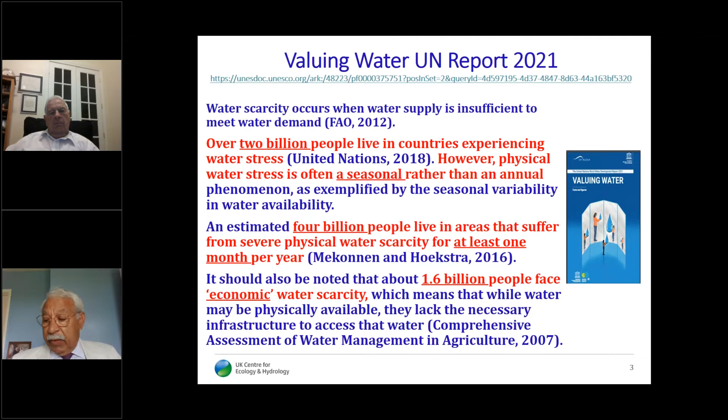So here I was defining water scarcity by saying the water supply is insufficient to meet the water demand. According to the last UN report of 2021, we have over 2 billion people living in countries where physical water stress is felt at least one season per year. And about 4 billion people live in areas where they feel water stress at least 1 month a year, in addition to 1.6 billion people facing economic water scarcity due to infrastructure not being in place, or the investment not being in place.

Also, the water shortage over the last decades shows the red regions in 1950 compared to 2000, 2025 and 2050. It shows there is an expected water shortage and water stress in different parts of the world as time goes by.

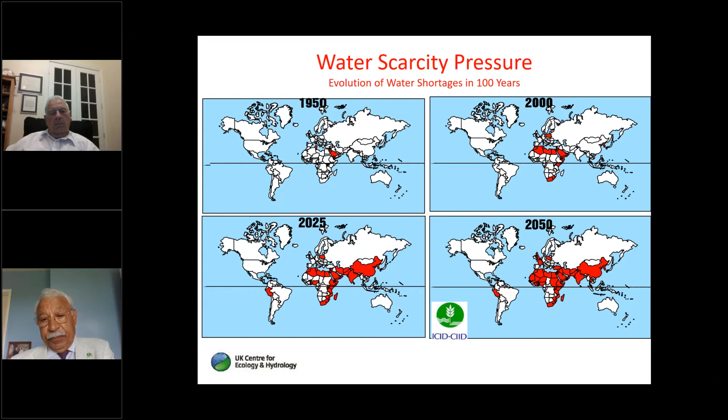And that actually triggered the call by Kofi Annan that we need a blue revolution in agriculture, and we really need to increase water productivity. We need to have more crop per drop.

Added to the population increase and the increase of water abstraction is climate change as well, and its impact on water resources. If we look here, the expectation is that some areas in the world will have less rainfall and higher temperature. Higher temperature means high evapotranspiration, higher crop water requirements, and reduced yield. We also expect to see some drought events and less rainfall in some areas as well.

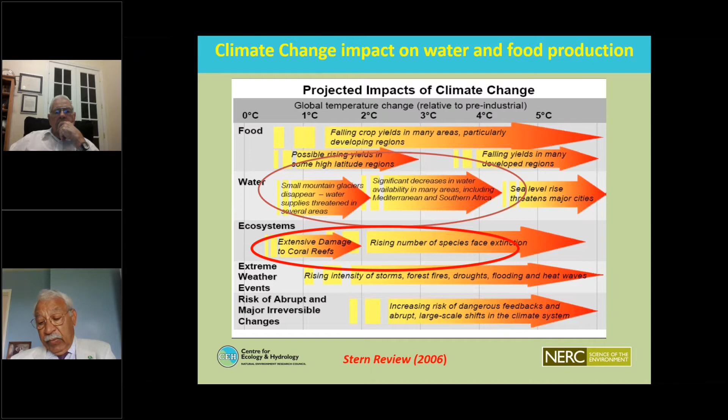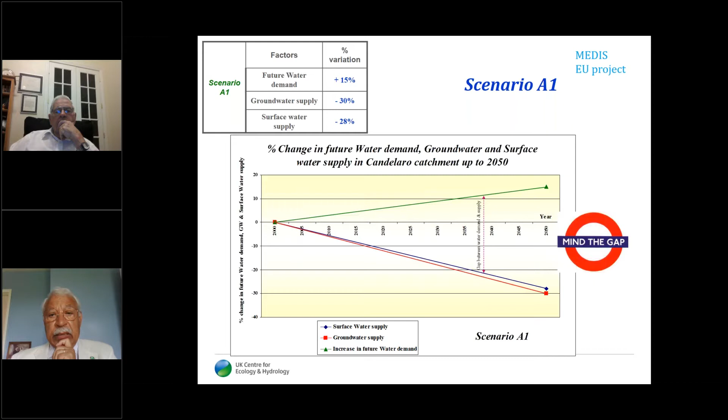And in our work in a number of EU projects, we have been looking at water supply and demand. The water supply and demand here in an area in Italy shows by 2050 there's a big gap. We also tried that in Cyprus, and we got the same gap between supply and demand.

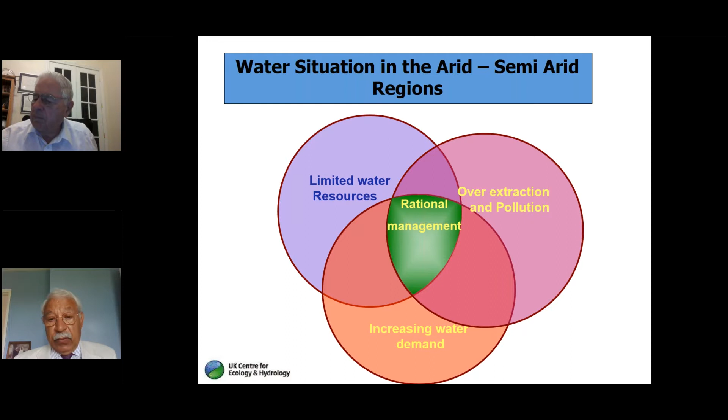So in water stressed and water scarcity regions, usually you have issues related to limited water resources, over extraction and pollution, and also increasing water demand, and that requires rational management of the resources. Rational management requires integrated water management, which looks at the supply side and the demand side. The supply side includes surface water, groundwater and non-conventional water resources.

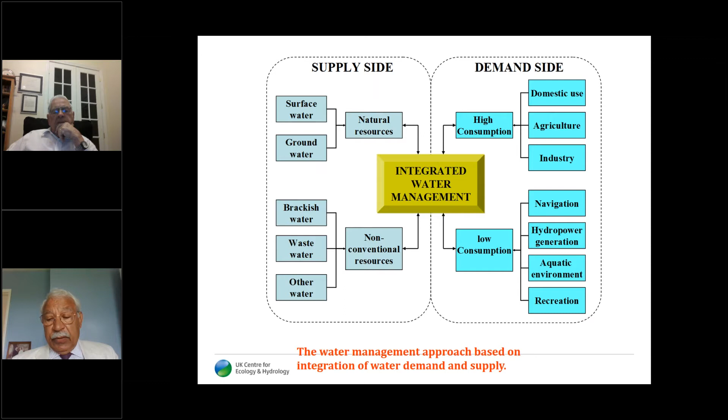On the demand side, you have the high consuming sectors like domestic, agriculture and industry, especially agriculture, which consumes at least 70% of the fresh water, and the low consuming sectors like navigation, hydropower, aquatic environment, and recreation.

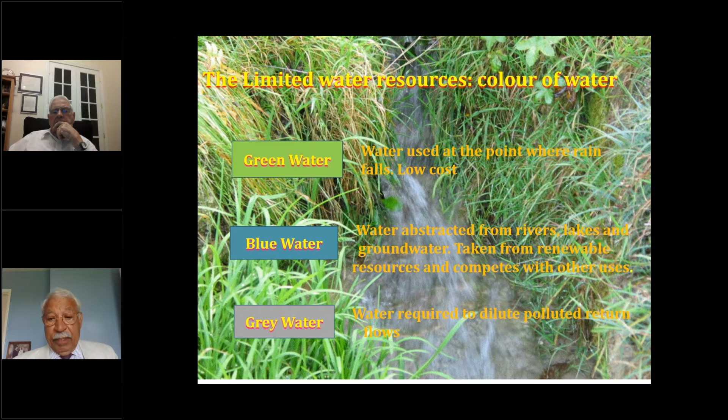Also, we need to take into account that we have different colors of water. Green water is the water that comes from rainfall. It is used where it falls, and usually it is at low cost. Water abstraction from rivers and lakes is labeled as blue water. And also gray water, which is the water that comes from domestic waste and industrial waste as well.

And the different approaches to cope with less water in water scarcity regions would direct us to increase the water supply and to use the water resources more efficiently. I will go to the first point, how to increase water supplies.

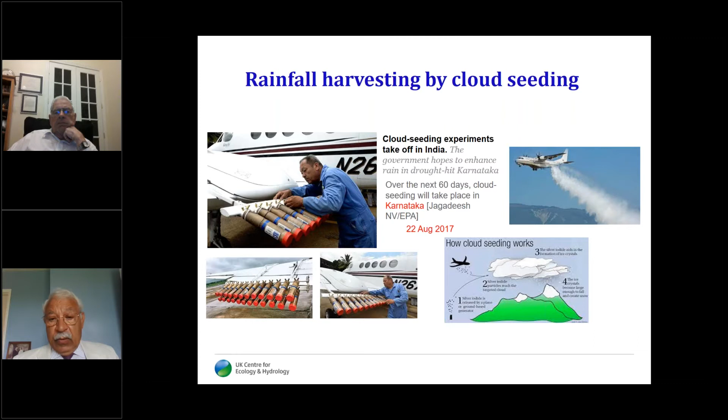And also here in Karnataka in India, where the state was subject to drought in 2017, they also used that in order to solve the problem of drought. And currently there is research here in the UK where they actually zap the clouds by applying an electric shock to the clouds and harvesting the water.

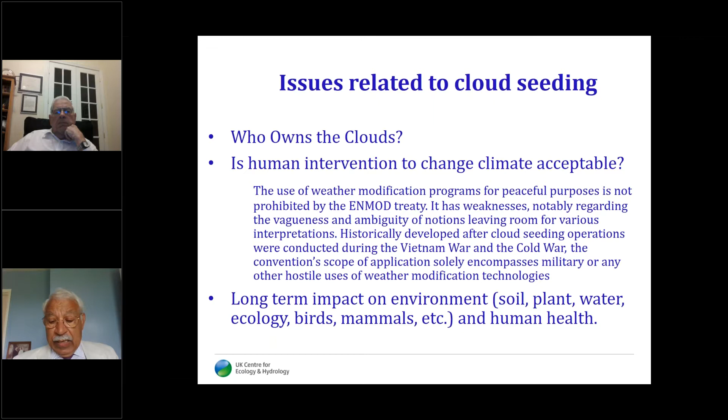Of course, there are some issues related to cloud seeding, related to who owns the cloud. Is human intervention in the climate acceptable? And what would be the long-term impact on the environment and human health?

These are some issues. Also, fog harvesting is another way of increasing water supply, and that implies having vertical mesh nets and then collecting the water that falls and runs across those vertical meshes.

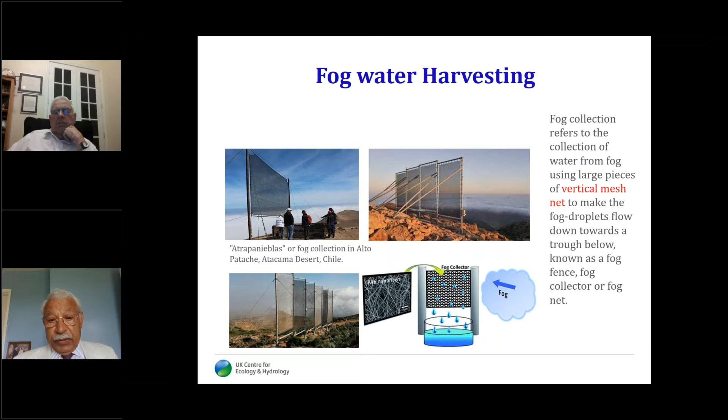Another thing, which I had a PhD student from Spain work on, is to use condensing surfaces. These are dew water condensers using films or foils that collect water from certain surfaces and harvest that water for different uses.

We can also harvest water at different scales: at the roofs of houses, and also micro catchments and macro catchments. In one small project I have been doing in the neighborhood of UKCEH, I looked at different houses with different aspects to the wind directions, different roof apexes and flat roofs, and looked at the amount these houses can harvest.

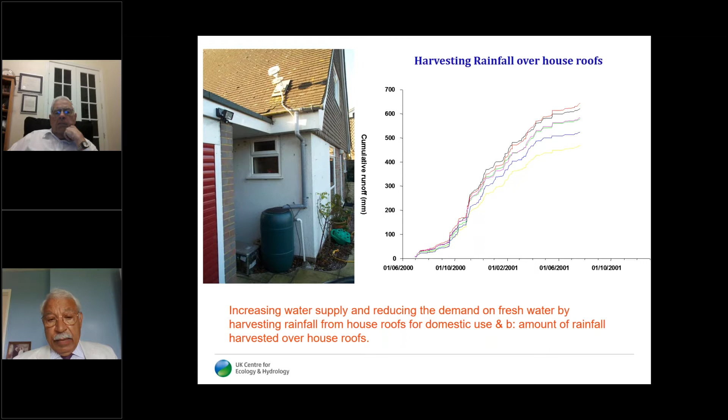And I was surprised to see that we can actually get a lot of water. Here it is about 700 millimeters within a year, which is really quite a big amount of water. And if you want to look at the balance of urban areas and cities, you can scale that up with LiDAR images, look at the number of house types and the number of units, and then work out how much you would harvest over a certain area,

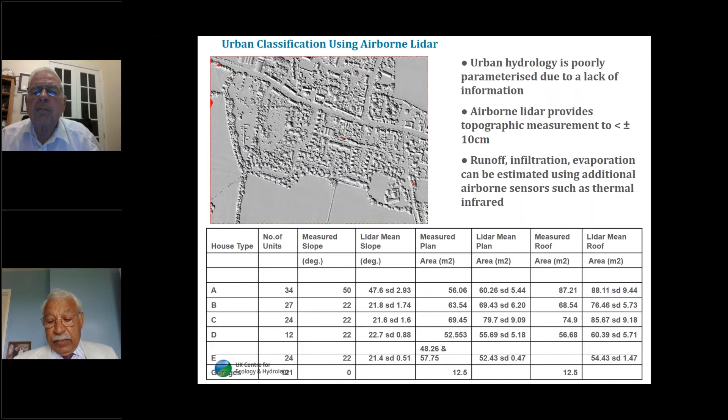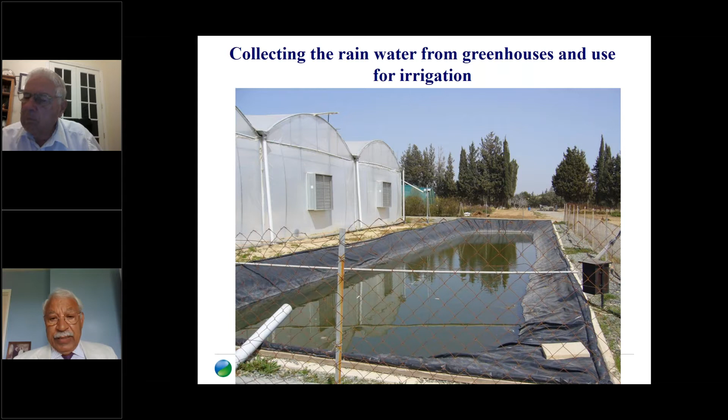and how much your sewage system or storm drainage system can cope with the runoff should you get that amount of rainfall. There are some publications you might also look at. Also, water can be harvested on top of greenhouses and used to grow flowers or even vegetables. That's another source we could look at to increase our supply.

Another thing I have seen in Brazil is underground dams, where they dig a ditch and then put plastic sheets between different sections. They have different ditches parallel to each other, dividing the area into sections, and the water that falls between one section and another remains within that section, with no lateral movement to the right or to the left.

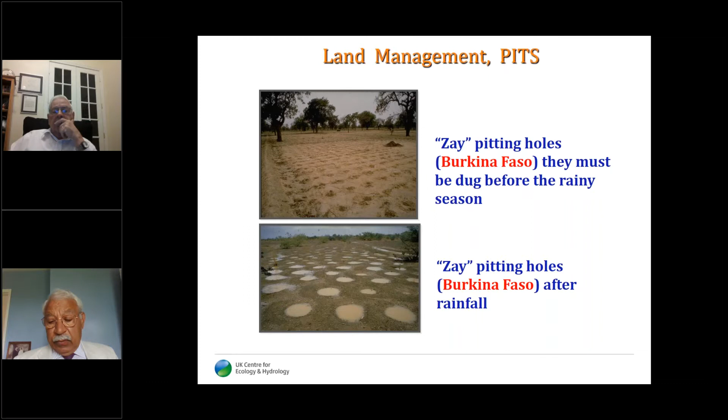Another thing we were involved in during the early 2000s is the zay, or pits, where we make land management holes to accumulate the rain, and then we plant those holes with crops or trees. And this is an example from activities in Burkina Faso, where they also use that system.

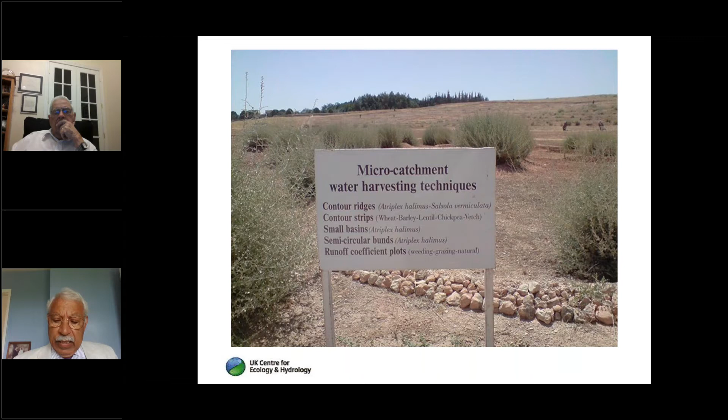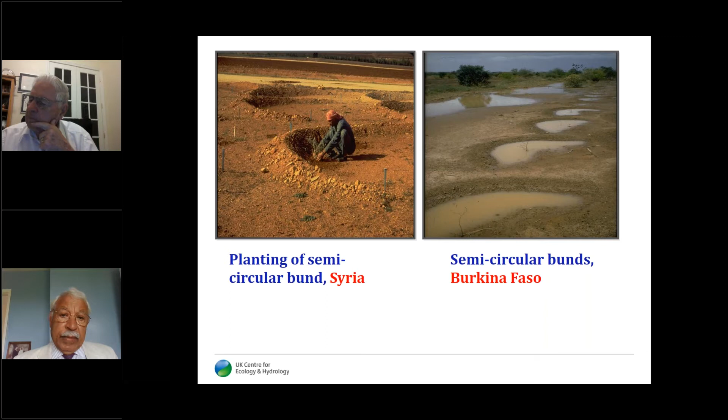Our work with ICARDA in Syria also looked at different ways of harvesting water through land management, and this is an example of them. Here are the different methods they used to harvest water as it falls in these areas. These are examples of how you organize your land so that when the water falls, it can be kept within these structures and used efficiently by the trees, as an additional source of water. So these are some examples of land management.

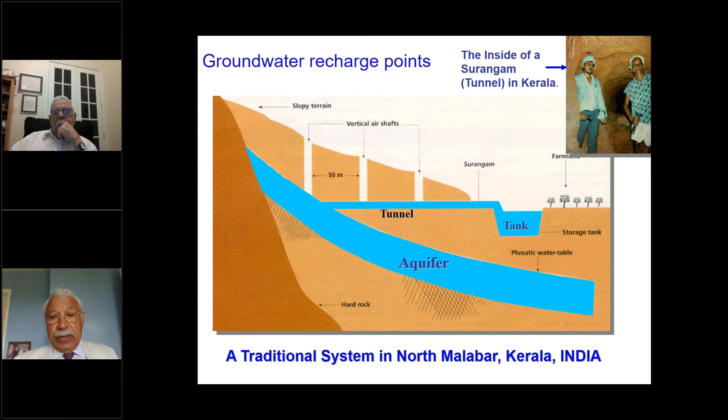Another thing is to select different points to recharge the aquifer. These points could be fed by rainfall, or by treated wastewater. Many countries have now started artificial recharge of the aquifer using treated wastewater, and then you can get that water through a tunnel and use it for different purposes.

At the macro scale, you know the direction of the runoff, and you come to the point where most of the runoff goes, which most of the time is the lowest point of the catchment, a valley.

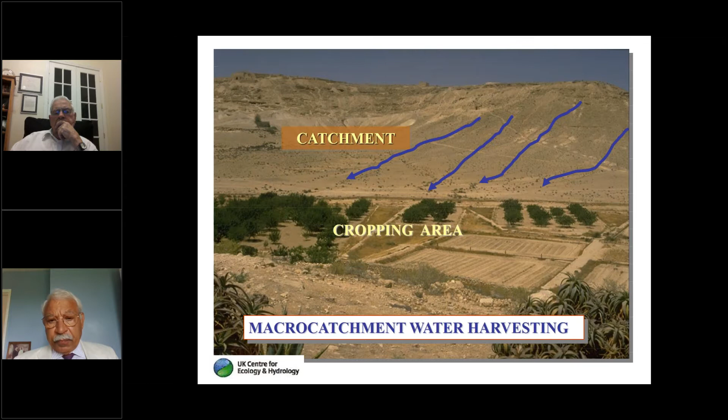And then you bring the agricultural activities to the lowest point where the runoff is actually reaching, and by this you can also minimize the cost of making structures to collect and so on. So this can also be useful, where you bring the agriculture to the area that's receiving the runoff.

Another thing I was involved in is looking at harvesting water in the mountains of the Mediterranean countries, Libya, Syria, Lebanon, Morocco, and Tunisia. We have been looking at constructing small lakes to receive the runoff from the mountains around. And we have been successful in that part, where the community were able to come closer and use the water for their social activities and agricultural activities.

We developed a model there. We can calculate how big the size of the reservoir should be. We had a probability of failure against the volume. So we know that we sometimes have to design these lakes based on the maximum observed runoff rather than the average. But also, if you wanted to reduce the size of the lake, you would like to know how much risk you are taking should you reduce the volume in order to reduce the cost of digging.

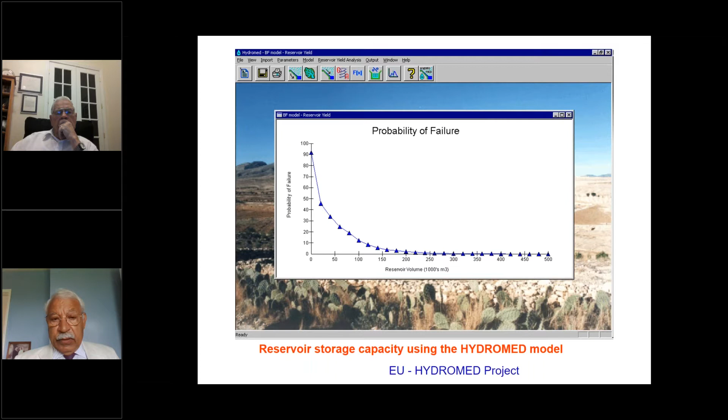So we produced that probability of failure module to allow the scientists or engineers to determine the proper size of those lakes with a percentage of success or failure. And we have been looking at different lakes and also calibrating these models in these water-stressed regions of the Mediterranean countries. There are some publications on that.

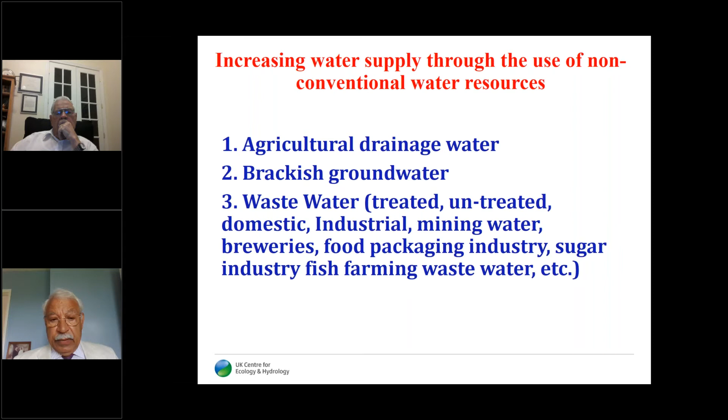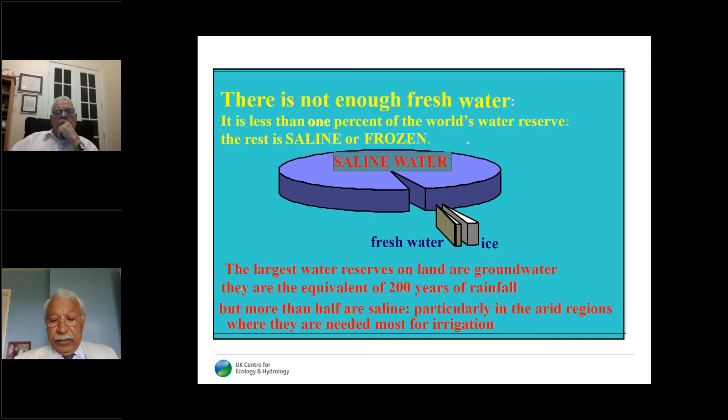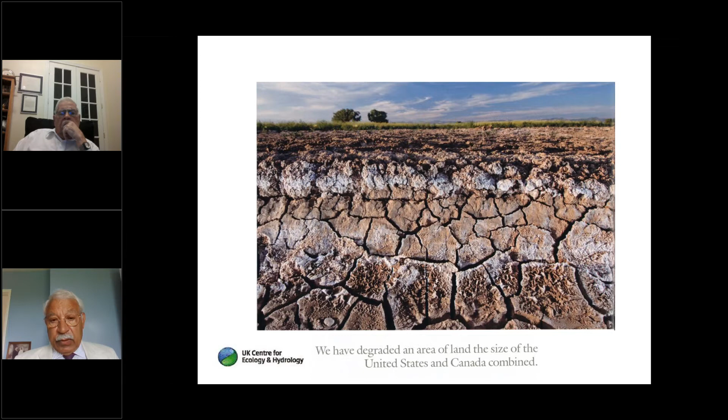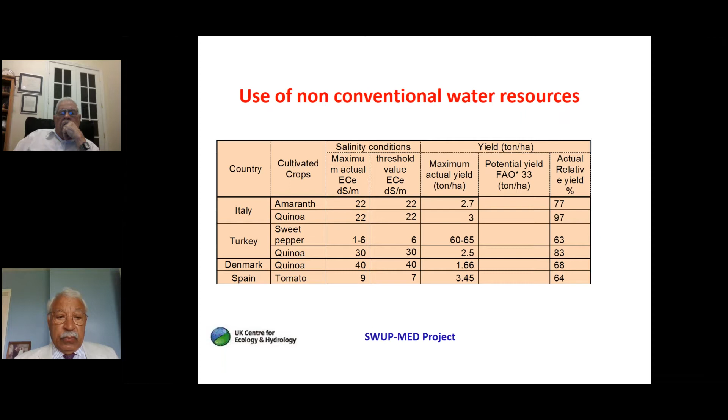And we have been using this in different projects in the EU. We have been using salt tolerant crops like amaranth and quinoa, and we have been using up to 22 decisiemens per meter salinity for quinoa and amaranth, and about 9 decisiemens for tomato to grow some crops. And this is an example of mixing fresh and saline water, an experiment in Napoli, in Italy.

We also used drainage water, saline water, in Egypt and in Syria to grow tomatoes. And we also tried that with cherry tomatoes in Malaga in Spain. So saline water can really be used to grow crops, and we also tried that with chickpea in Syria.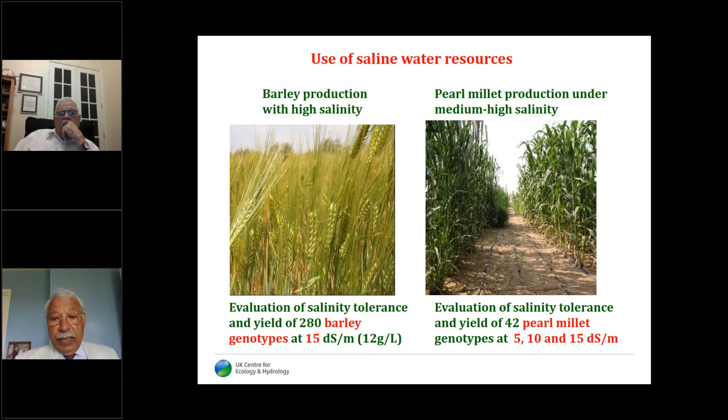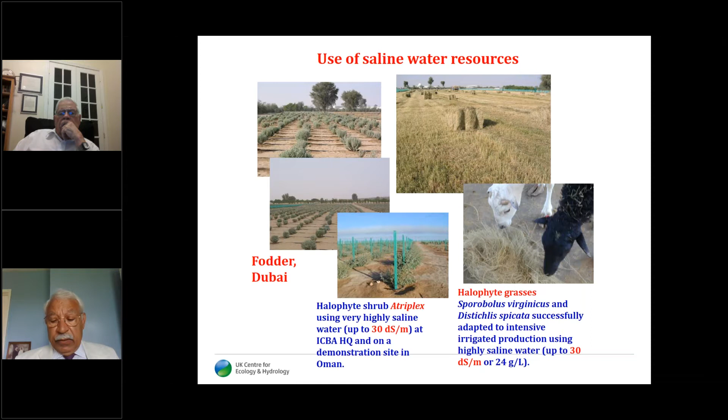The ICBA, or International Center for Biosaline Agriculture, managed to produce barley with 15 decisiemens per meter saline water, and pearl millet also at 15 decisiemens per meter. And they have also been able to produce fodder for livestock and some pharmaceutical plants with up to 30 decisiemens per meter.

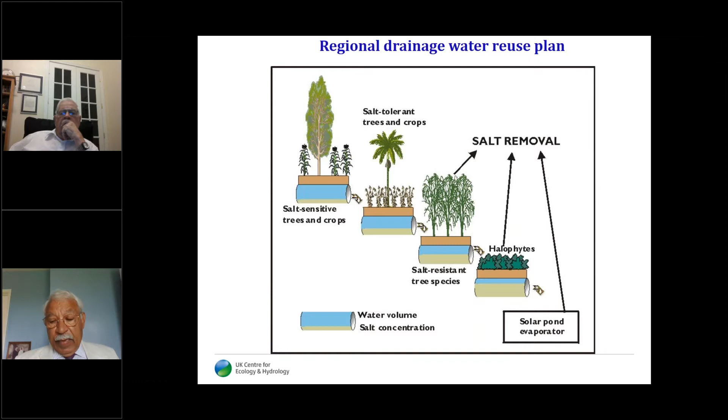Also, you could use that drainage water in a sequential way, where you apply the water first on the most sensitive crops, then you collect that drainage water, apply it to a more tolerant crop, and then collect the water and apply it to a more tolerant crop than the one before, until you come to more saline water in the sequence, which you can apply to halophytes before you dispose of that water.

In our work in India, we found there are other sources we could use from distilleries, and there are so many, about 630 distilleries in India, and also breweries, and we used the water of the Kingfisher Beer factory for irrigation, and also sugar mill effluent from the sugar industry for irrigation. And this is an example of using the wastewater coming from the sugar industry. It's clean water. It just needs minimal treatment to be used for irrigation.

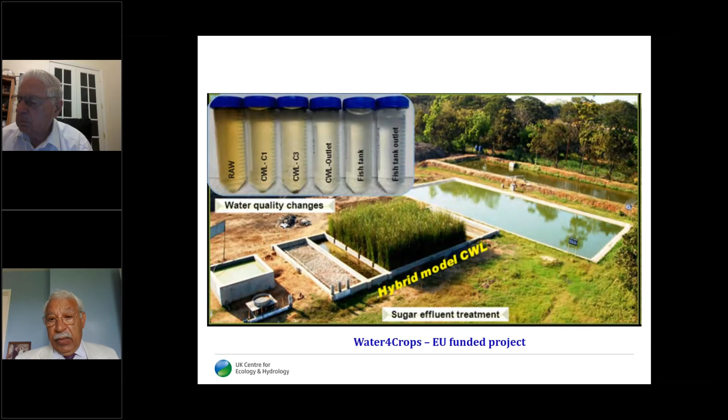And that water could also pass through different filters and then end up in fish tanks. And if we take the drainage water of the fish tank and irrigate with it, we can also produce more crops. And there is a paper here, which won the ICID best paper in 2017, where we demonstrated that the drainage water coming from fish ponds can actually produce a better yield than even the fresh water itself.

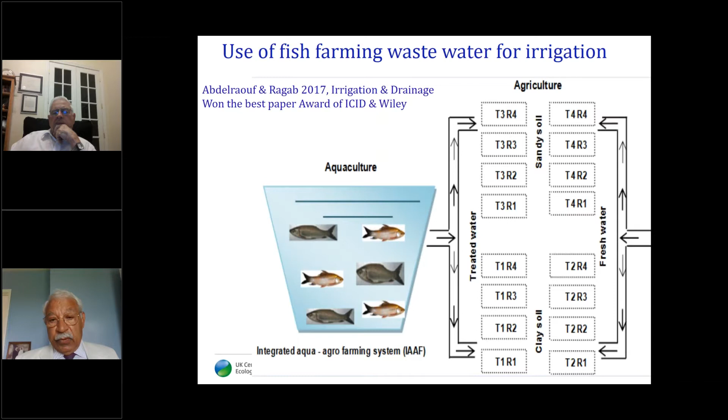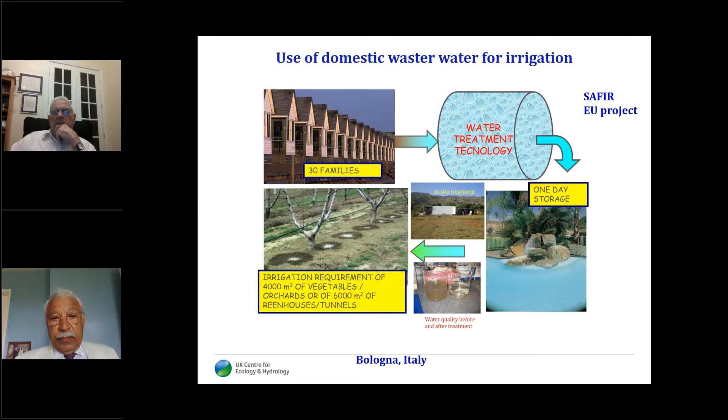Another thing we used to increase the supply of water is to use the treated wastewater, especially domestic wastewater for small communities, and by having a portable system with the help of a Danish company called Grundfos, we're able to produce containers, and these containers actually can treat the water, and then that water goes to a drip irrigation system.

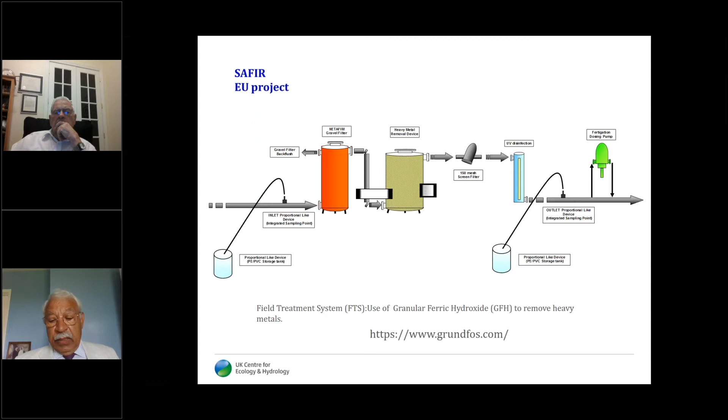This is really what you see as a shipping container, but inside that container you have this purification system where the water is treated inside, and even if it's industrial, there is ferric hydroxide to treat any heavy metals if need be, and we use that water for irrigation. And the water really comes out after the treatment clear enough and of good quality to be used.

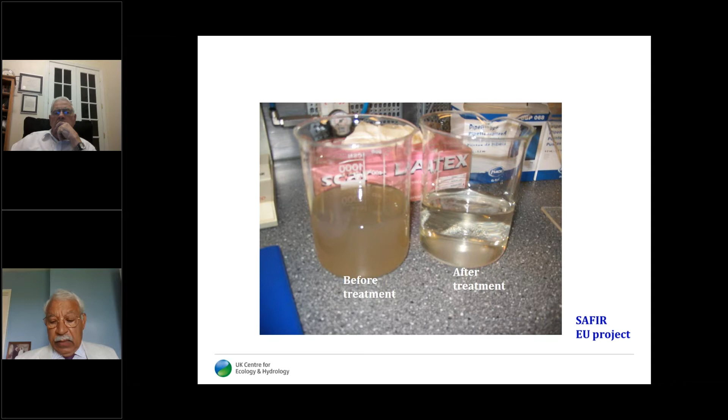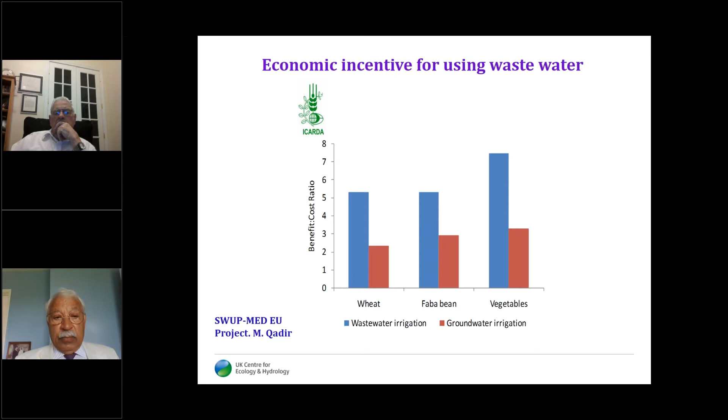Treated wastewater has been used for olive trees and also for fruit trees in so many countries. And our colleagues in ICARDA looked at the yield obtained by irrigating with wastewater compared to groundwater, and really you can see there is more benefit in using wastewater because it has so many nutrients, so you get a better yield and you get more benefit compared to the cost.

Improving water use efficiency is another way to deal with water scarcity, especially irrigation, because it is using 70% of the freshwater resources. It is really important to improve its efficiency. And efficiency goes from the reservoirs all the way to the field. Over the reservoir you have a lot of losses by evaporation, and until it reaches the field you have the transport. During the transport you have leaks, and also evaporation as you go down to the field. So we really need to produce more crop per drop.

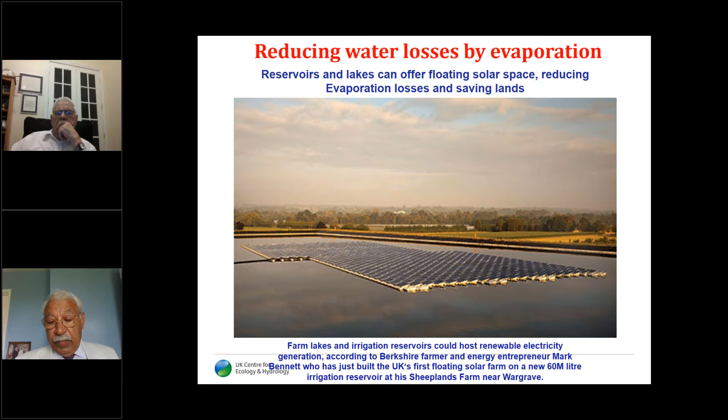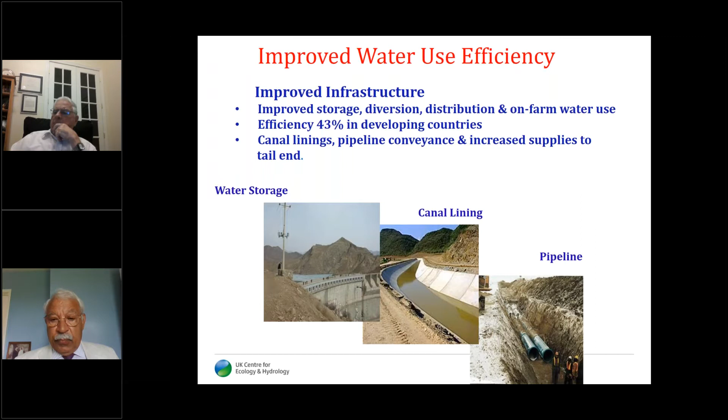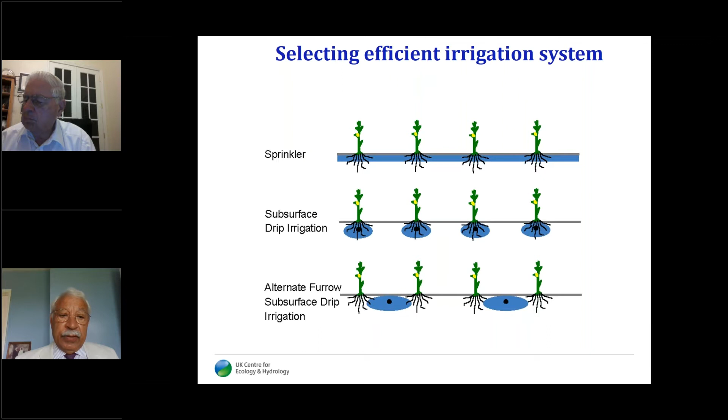Also, we need to select the most efficient irrigation system. Sprinkler irrigation is one of the efficient systems. However, it irrigates between the plants. The dry areas between the plants also contribute to losses, because that water will evaporate and the plant is unlikely to use it. Drip irrigation, especially subsurface, is much better than sprinkler, because you don't irrigate the dry areas between the plants and the water just goes straight to the root zone.

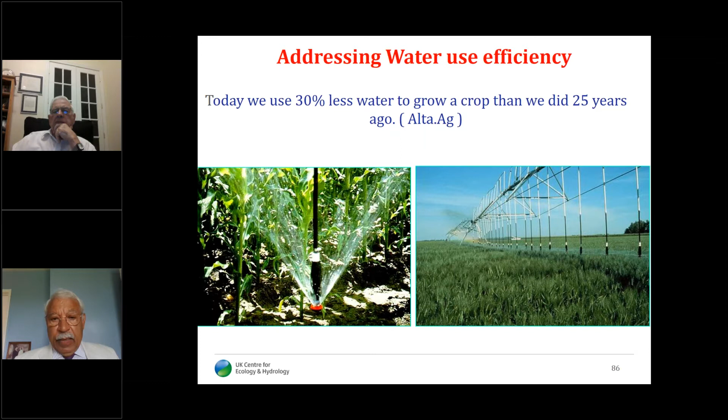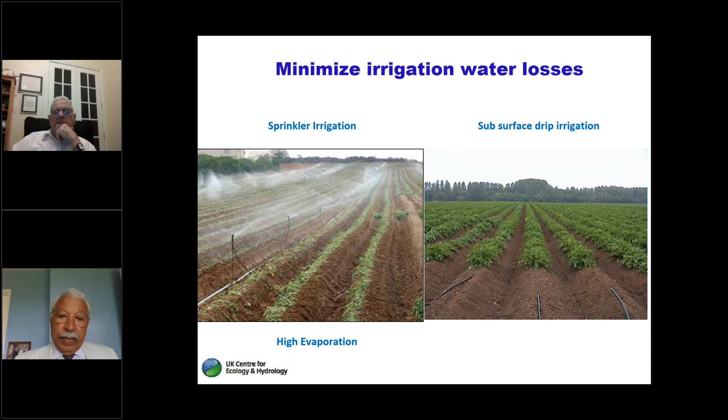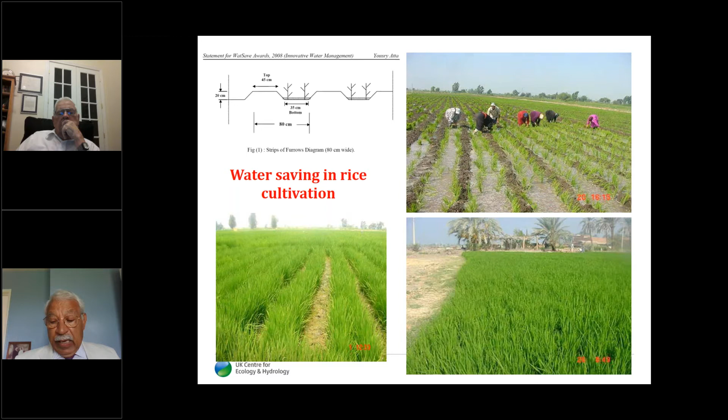Rice is actually quite a water consuming crop, and there is a paper that won the WatSave prize of ICID, where there are different ways to cultivate rice using a lot less water, and that would make it more efficient in water use.

One half of the roots goes to the right side of the plastic sheet, and the other half go to the other half. And by this, when they irrigate only one half, then half of the roots only would be irrigated. They apply mild stress. And this is really, they call it partial root drying. So you actually wet half of the root zone and you leave the other half dry, and then next irrigation you do the other half.

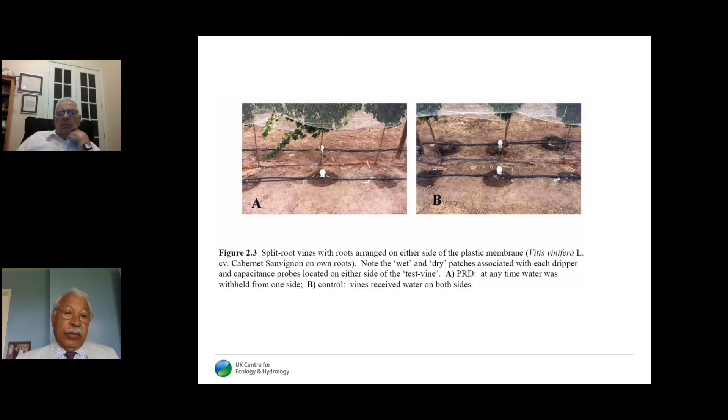And this is an example of how they look like with the sheets actually in between, and the roots are split across the sheet. We tried to use this idea of the Australians, of the vineyards cultivation, on actually field crops. And we have been doing that by using double drip lines, and the plant is in the middle without having any plastic sheet or digging. And we apply the water to one drip line and leave the other one off. And the next irrigation, we do the opposite. And by this, you only irrigate half of the vertical root zone at a time.

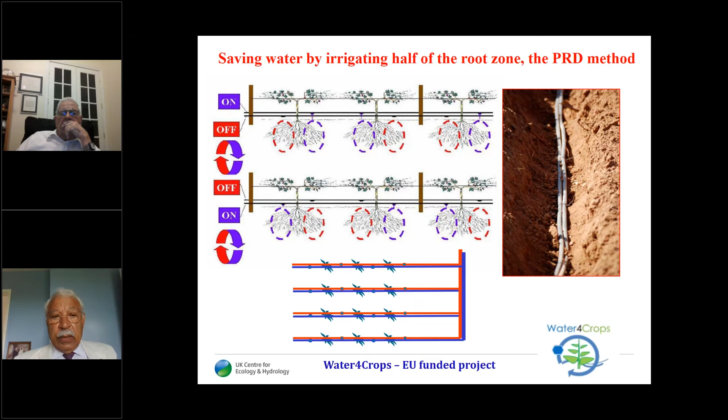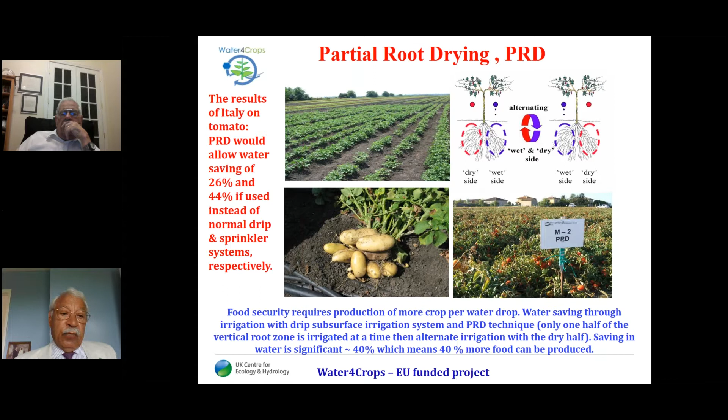And we found actually that subsurface PRD, or partial root drying, is quite a good water saving practice. And here we could estimate that, compared to the normal irrigation, PRD would save 26% of the water, and compared to sprinkler, we can save 44% of the irrigation water.

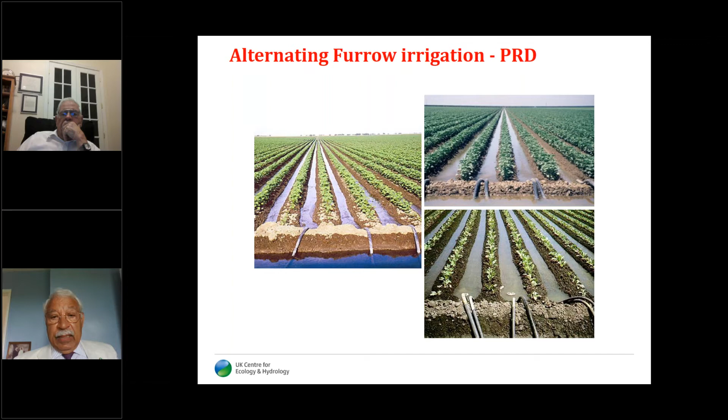And also you can apply PRD on a furrow. When you apply furrow irrigation, you can just allow the water to go into one furrow and leave the next one dry, and apply to the one after, and so on. So you can start by irrigating the odd numbers of the furrows, and then the second time you apply the water to the even numbers of the furrows.

There is something else new that came to light recently. We call it nano irrigation. And nano irrigation is a system or a technology that slowly releases small amounts of water, continuously moistens the soil, and enables 24 hours crop irrigation. And this is really using a semi-permeable membrane. Usually it's a flat membrane, and it seems to be a promising way.

And there's not really much publications about how much water they save in comparison with PRD, for example. Maybe that's an interesting point for someone to do research on, but it seems to be successful, and it would minimize the labor, and also you don't need to worry about when to irrigate and how much to irrigate. So it is really a continuous seepage of water from a semi-membrane based flat tip.

Another thing that has been used in the south of Italy is the aqua card. It's like your Visa card or credit card, that each one in the area is allocated a certain amount of water, and then you take that card, and it would allow only this amount for you, regardless how rich you are or how big the area is. You have a certain allocation based on the type of crop you have, and also based on the climate.

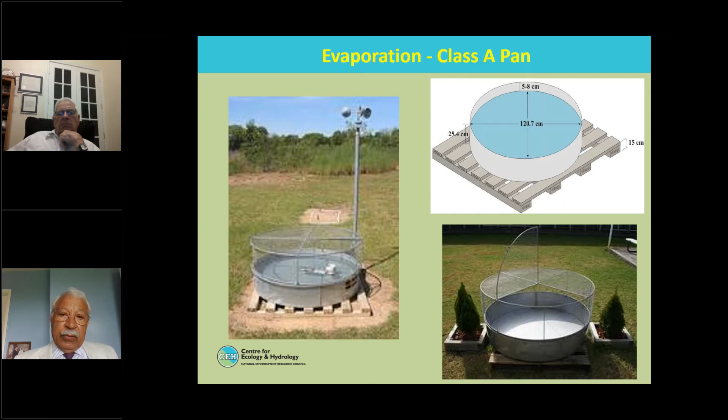Another thing to improve the water use efficiency is to accurately estimate how much water you need to apply and when. And when we started to look at crop water requirements, we started by using Class A pan, but this is a free water surface. It's not really representing the plants, because plants have biological control on how much water they can lose by transpiration. So that was the first trial the scientists came up with, and then we started to move on, and I started to look into this technology, and we have been applying different technologies.

One is a scintillometer, eddy covariance, and COSMOS, and I'll be talking about that on the 23rd of June in the IWF webinar. So you can join in if you would like to know more details.

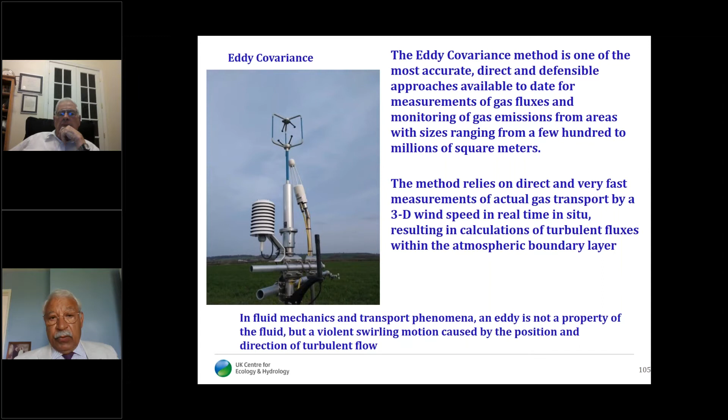So the first instrument is the eddy covariance, which directly measures the evaporation flux, the H2O flux, through those sensors. And the second technology we used was scintillometry, or the scintillometer.

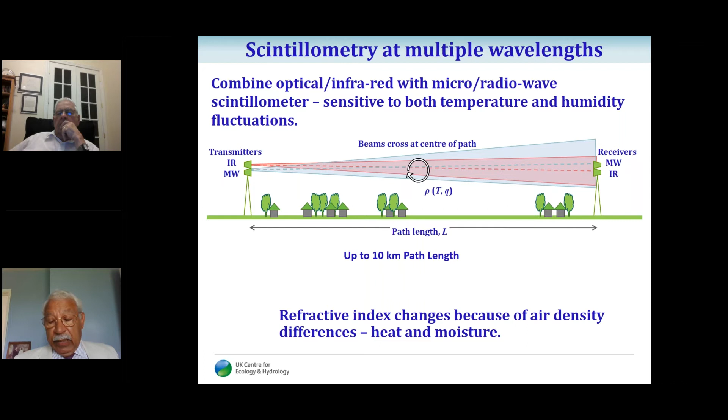Scintillometer has got a transmitter and a receiver, and it combines optical infrared with micro radio wave, and we look at the changes actually in the refractive index because of the air density differences, heat and the moisture, and we calculate from that the actual evapotranspiration along the path. So this is really what the eddy covariance does. It looks at the direction of the flow of H2O caused by the evaporation.

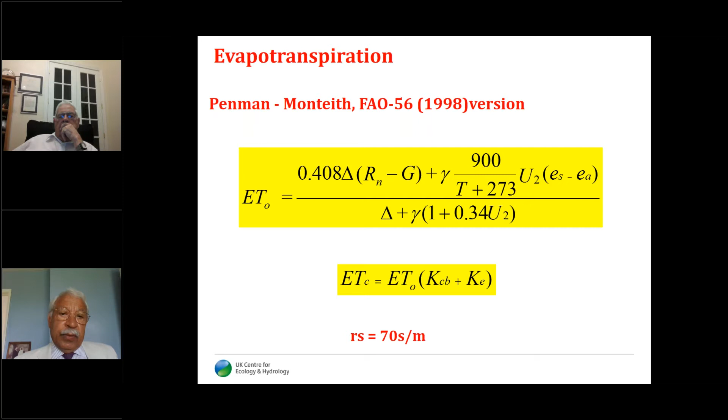And we have been looking at what actually the scintillometer and eddy covariance measure as actual evapotranspiration compared with what we calculate from the commonly used Penman-Monteith modified equation of FAO 56, for which ICID contributed through the work of Rick Allen and Luis Pereira when they were members of the Water and the Crop Working Group. And this is the equation used by FAO and widely used nowadays. And we compare the results

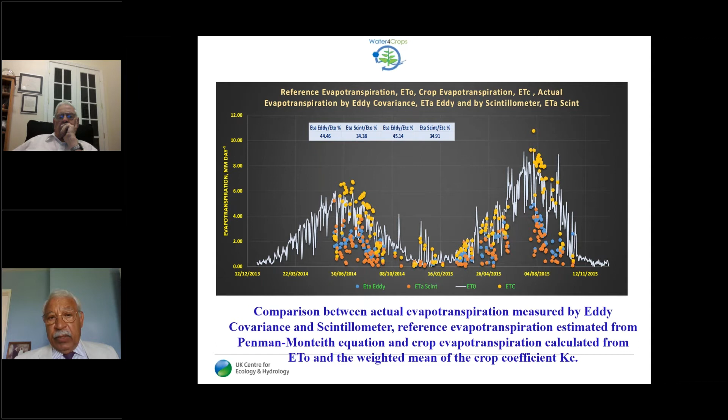So the actual evapotranspiration measured by these equipments actually tells us we are over irrigating when we use equations, because these equations are likely to represent the atmospheric demand for water, not really what actually evaporates from the soil and the crop, which is the crop water demand. So there is a lot of saving if we base the crop water requirements on actual evaporation rather than the potential evapotranspiration. Another new technology we used is the Cosmos.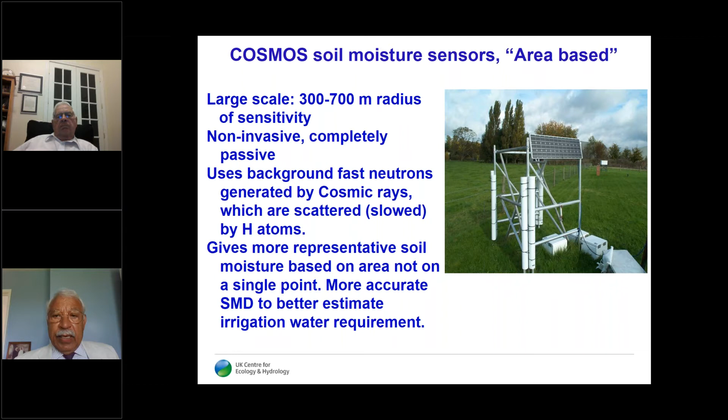That would actually give us soil moisture and soil moisture deficit. And if we know the soil moisture deficit, then we can apply that amount as irrigation requirement. And the Cosmos technology can give us a large scale, 300 to 700 meter radius, integrated soil moisture value, and it's not radioactive, compared to neutron probe and others. There is no radioactive source in Cosmos. And we have about 52 stations currently in the UK for Cosmos, and we can get real time data.

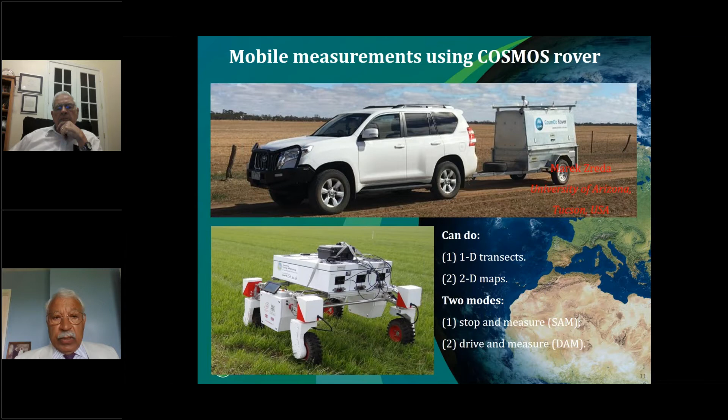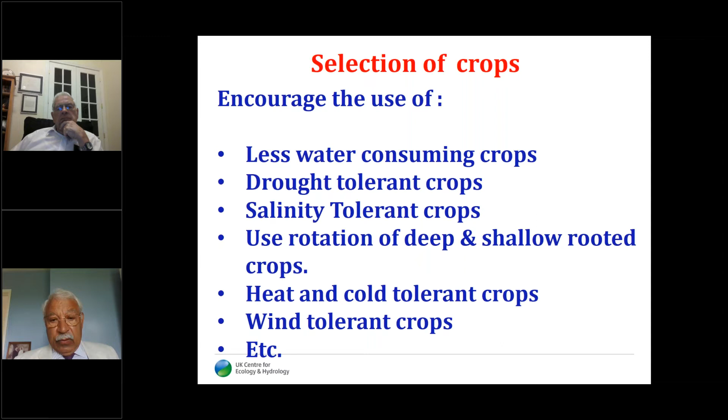The selection of crops is also important, that we use less water consuming crops. We can also use drought tolerant crops, salinity tolerant crops, use a rotation of deep and shallow rooted crops, and also heat and cold tolerant crops, and wind tolerant crops. That's also something we need to look at. And when we have water stressed regions, we are supposed to use crops that would use less water. For example, 1 kilogram of wheat could use 1,350 liters of water, while rice would consume 3,000 liters. So we've got to make the choice according to the amount of water you really have.

We tried to grow quinoa and amaranth in one of the EU projects because they are drought tolerant and also salinity tolerant, where we can use brackish groundwater to irrigate, and also they are very nutritious plants. And we tried that in Turkey, and it has been growing happily, and in Italy, Morocco, and also in the UK. Although we also get some droughts here in the UK, we try to see if quinoa can grow here as a cereal crop, and we could use it to produce flour and make bread and cakes like we use wheat.

Field management is also important for conservation of water. Suitable tillage, conservation tillage, precise input, monitoring systems, agro-environment, wildlife strips at the edge of the field to enhance pollination rate are also practiced here and encouraged by the government. Weed management and leveling for better water distribution. These really would help us. And what is coming more now into the UK farming community is to use mixed cropping, which helps to pollinate and to control weeds as well, and increase the yield.

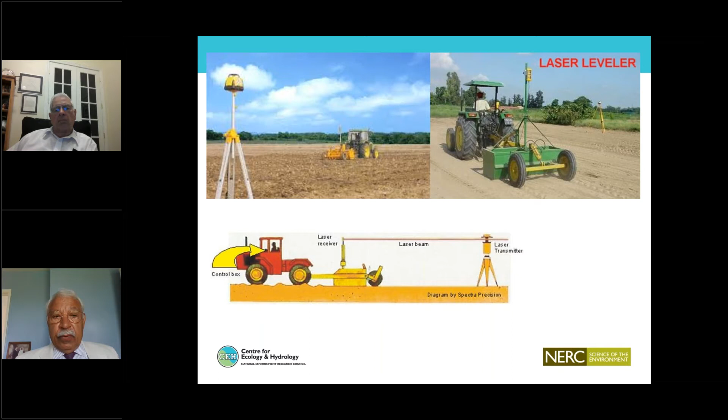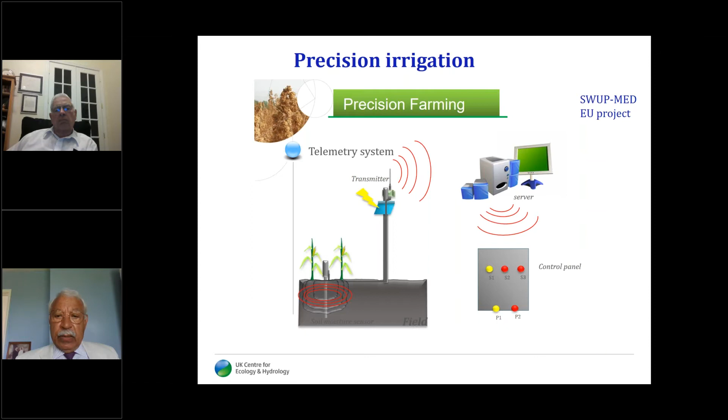Laser leveling is also important for efficient distribution of water, especially by sprinkler and surface irrigation. Precision agriculture is also important to reduce the input to agriculture, and we have been using that in this example from a project in Morocco, where we were using soil moisture sensors that would send a signal to a transmitter to the control unit to open the irrigation system.

So nowadays we have a lot of apps, and most of the tractors now have all those instruments and gadgets and mobile apps to help them do a bit of farming from their own tractors. And nowadays they started to use drones to look at the nitrogen need or deficiency for the crops. Some of them started to measure the temperature over the canopy as a sign of the need to irrigate or not. And in Australia, they started to use that also to monitor the water quality of the lakes where that water could be used for irrigation as well.

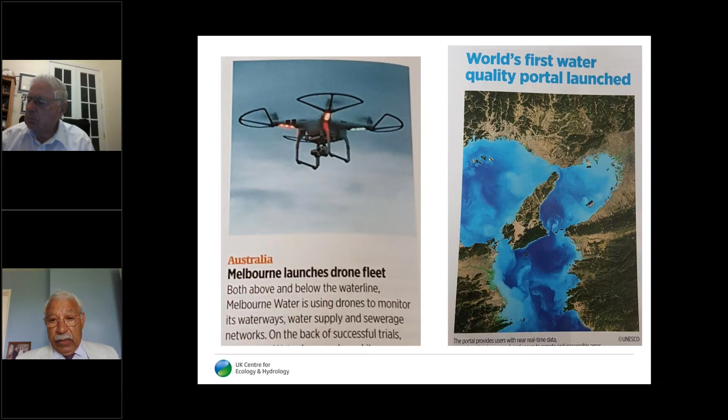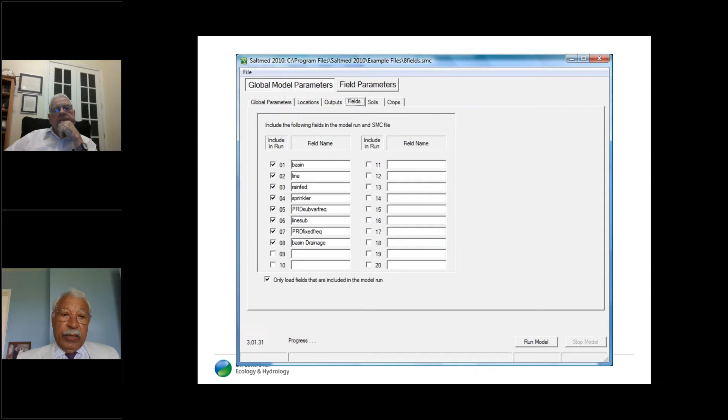It would allow a maximum of 20 fields with different treatments or different irrigation systems or different crops, any combination you like to study. It would also allow you to look at nitrogen fertilizer management and nitrogen leaching if you are concerned. It would also look at open and tile drainage systems, and at rotation as well, up to 20 field rotations. So it will help you to do a lot of scenarios. And also you could monitor the soil moisture.

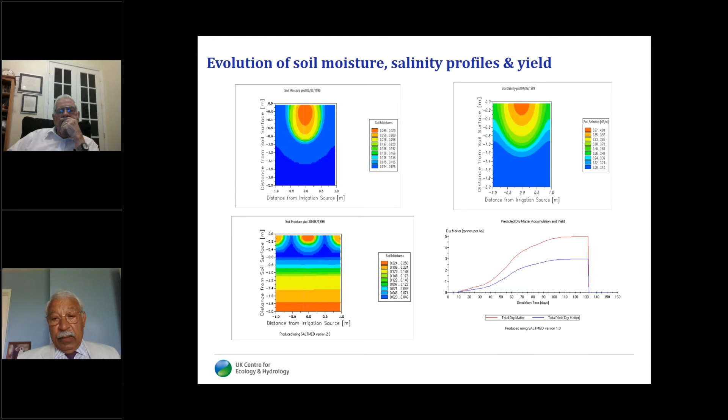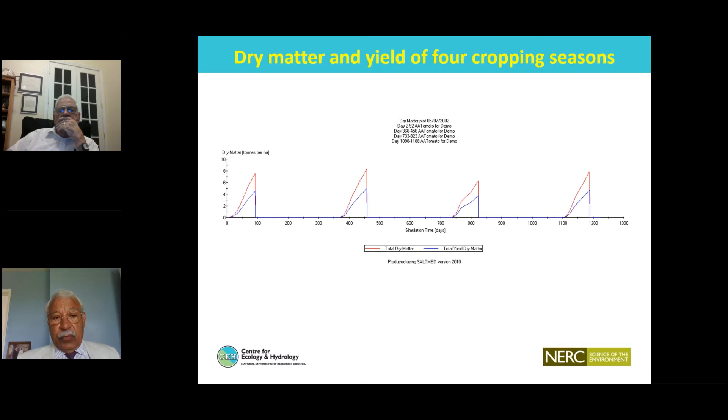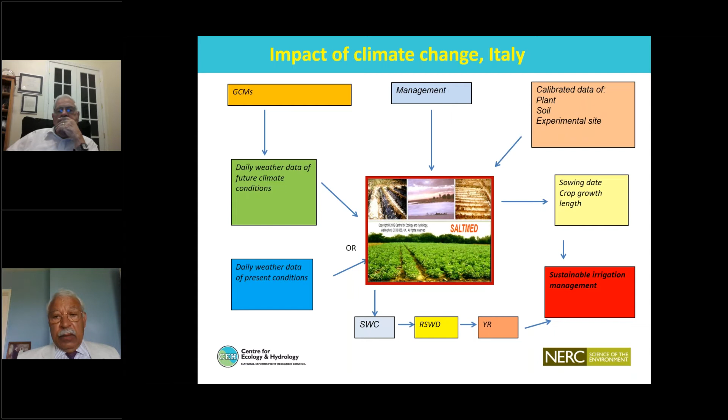And this is what you can see on the screen when you run the model. You can see the soil moisture and soil salinity. If you are running multiple drippers, you can also look at them, the dry matter and the final yield, and at what's happening to the groundwater level with time. If you have a rotation, it will tell you the yield in each rotation. And also you can run the SaltMed model with climate change scenarios to see the impact of future emissions on the yield and the crop season length.

This is from a PhD student in Napoli. He was running these scenarios on amaranth, and he concluded that according to climate change, the season would be shorter by 16 days in the future. For amaranth, the actual length of the season is 114 days, which is the bottom red line, and with the 2095 high emission scenario, that season could be shortened to 98. If you are using drip irrigation, it means you save 16 days of irrigation by that time. So you can use the models to look at the climate change impact.

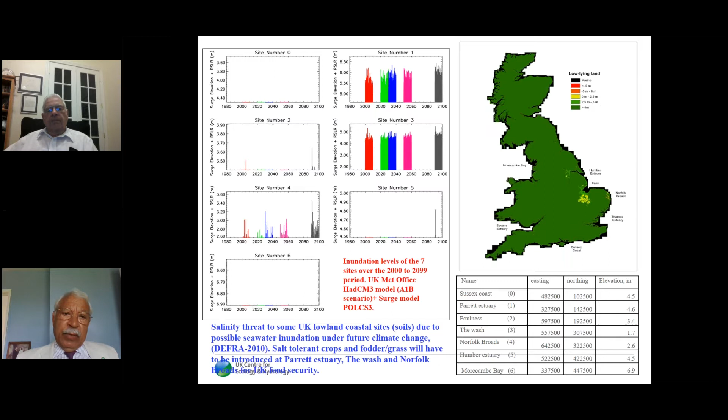And here is another thing that we applied for sea level rise and seawater inundation in 7 sites across the UK. We have been looking at the vulnerable sites in the UK to see how deep salinity would go and over which period of time. At one site, it didn't take long, from 25th of January 2020 to 25th of November, hardly a year, and the top 10 meters already had the salinity of seawater, which is 45 decisiemens per meter.

While in another site, from 2020 to 2029, so one decade, the salinity didn't really reach that 45 decisiemens per meter as the previous site, because the predicted rainfall at that site was much higher than the predicted rainfall at the other site.

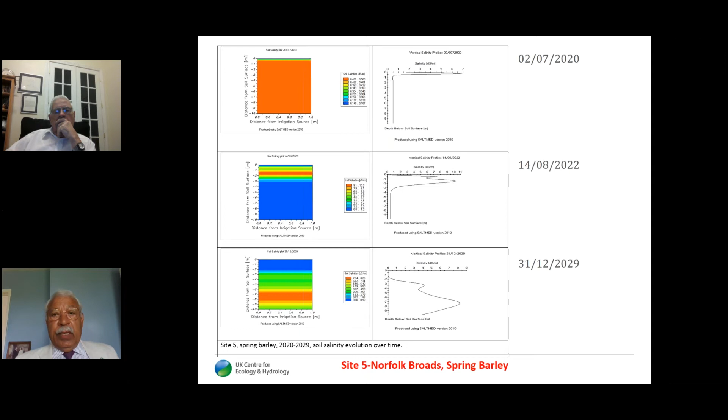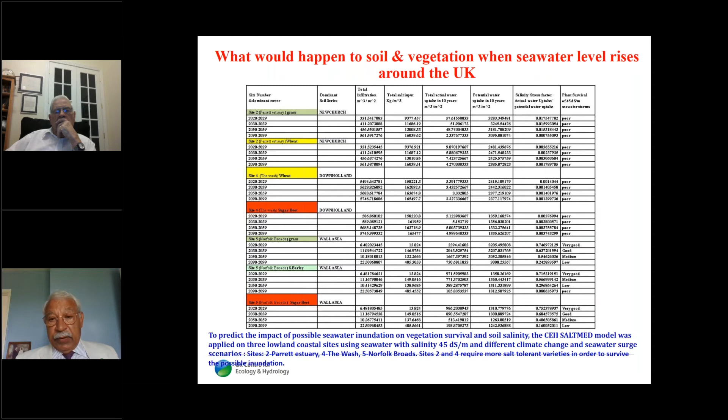But also we came up with the most vulnerable sites map and what to do about them, and most of them actually are for grazing and cereals. So we recommend that we use a salt-tolerant type of grazing like Bermuda grass, and also different types of wheat and barley that can tolerate salinity. There is a publication here by the Department for Environment, Food and Rural Affairs.

So at the end of the presentation, we have now covered several approaches to deal with the issue of water scarcity. The only thing really for us is to select the right ones. Thank you.

Thank you, Dr. Ragab, for a very good and interesting presentation, giving a lot of details on the ways and means to cope with the challenge of water scarcity and how to meet challenges in water-stressed regions. Now I'll request Dr. Frank Dimick to give his remarks before we go to the question and answer and discussion part. Dr. Dimick. I had a couple of observations, Dr. Ragab.

Number one, just out of curiosity, has there ever been a look at the fact that increasing drought frequency might be an indicator of future water scarcity problems? Well, in the work we did here in the UK, we predict that there will be an increase in the number of drought events. And this is associated with the decrease of the rainfall. And we published, I think, a couple of papers on that.